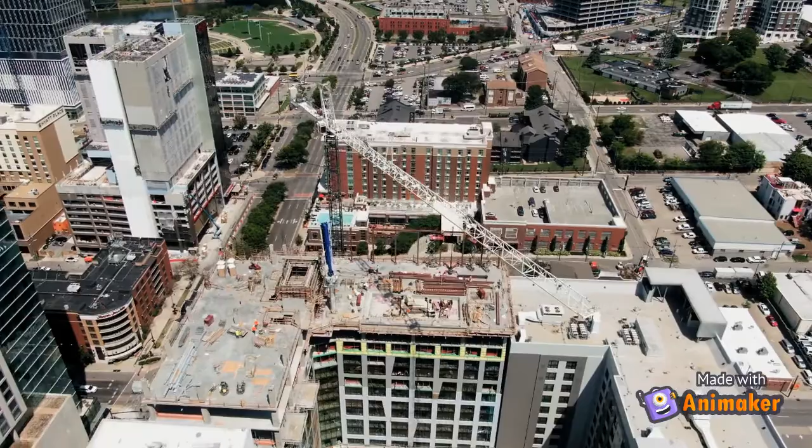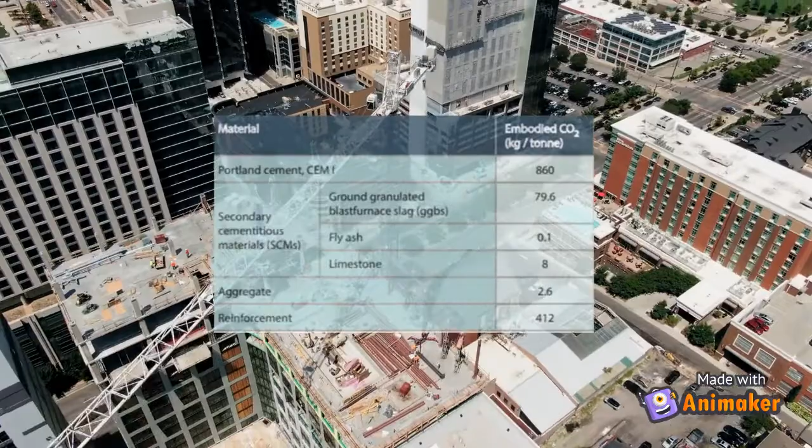The impact on climate change resulting from carbon emissions from anthropogenic activities is one of the major challenges in attaining environmental sustainability. Approximately 40% of annual global greenhouse gas emissions come from buildings, where embodied carbon is responsible for 28% of building sector emissions. Use of cement in concrete plays a vital role in emission from the building industry.

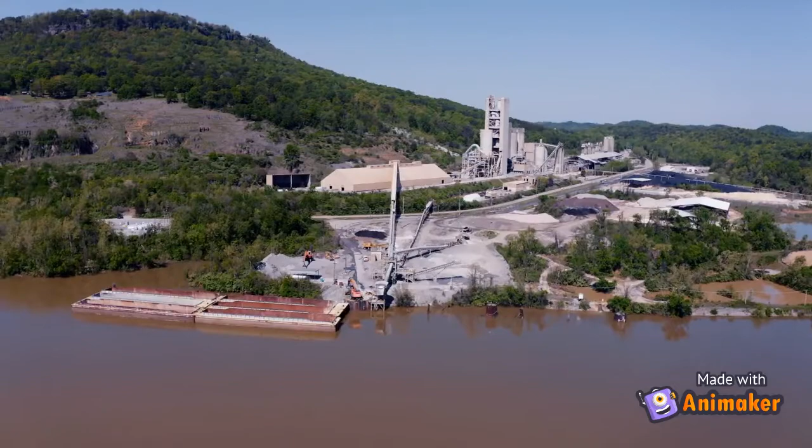Cement production currently accounts for about 5 to 7% of global emissions and is also the most crucial ingredient in one of the most common building materials globally. It is unimaginable to think about a world without concrete as we have across the globe. Bridges, offices, houses, dams, power stations, tunnels, and an infinite number of structures are made with concrete, from the immeasurably massive to the humble stepping stone.

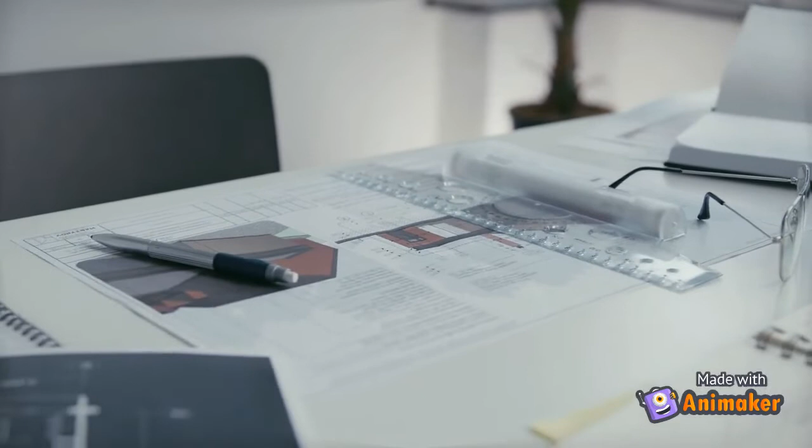The structural engineers who take part in most of the design aspects of buildings can play a significant role in turning construction into more sustainable and greener ones, with the right choice of building materials and adapting wise strategies during the design phase so that the buildings will have a longer service life and lower emission during their service life.

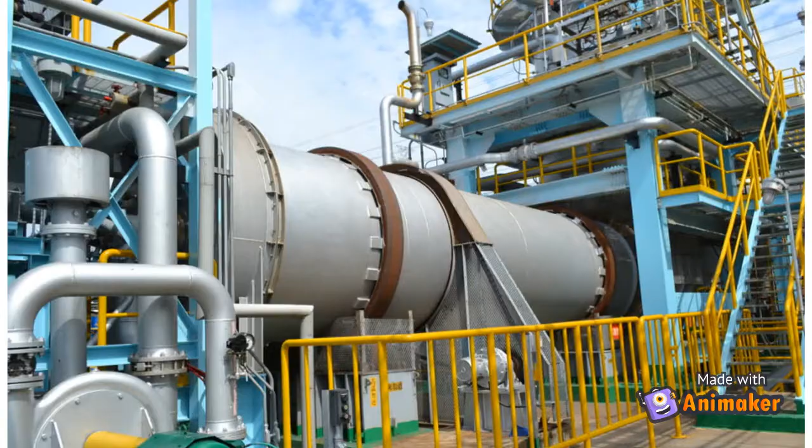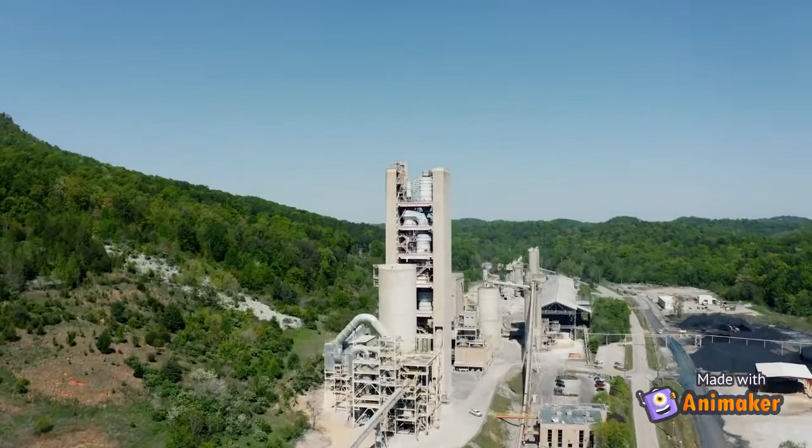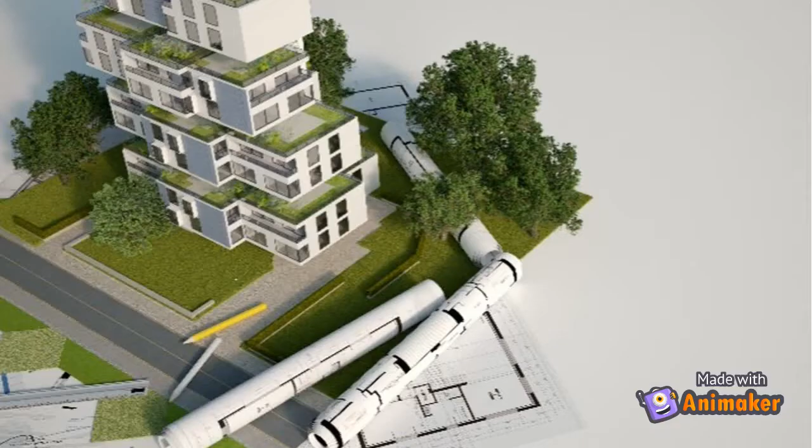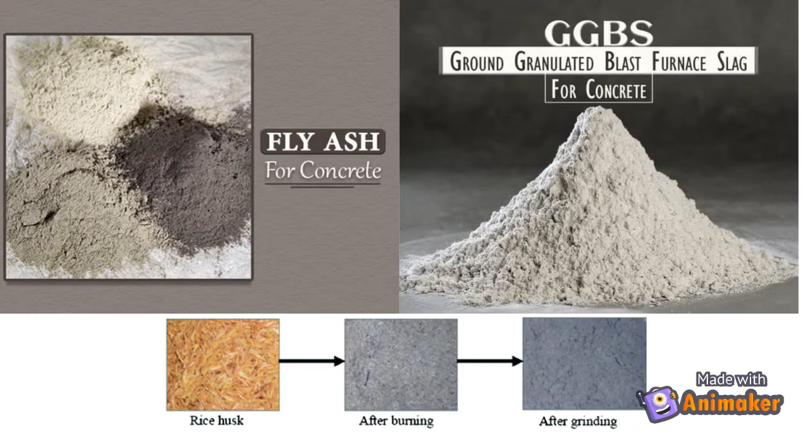A considerable amount of CO2 is from the heat produced during the non-stop running of hot kilns. However, half of Portland cement's emissions come from calcining limestone, which produces CO2 during the chemical reaction. Therefore, the most effective way to reduce the negative environmental impacts of concrete is to limit the use of cement or replace it with secondary cementitious materials. Building materials with carbon storage potential can offset the emissions from other materials in the buildings to achieve a net zero carbon footprint.

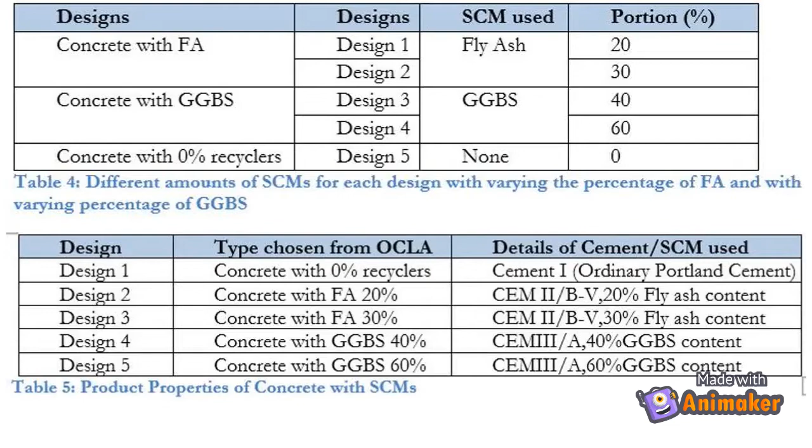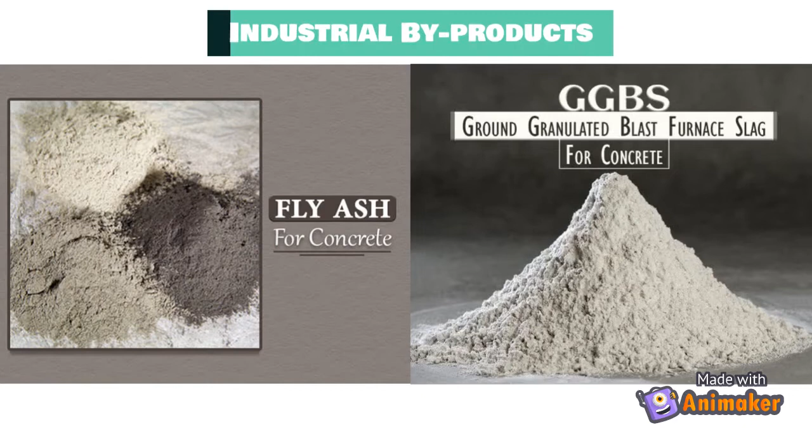The LCA results using One Click LCA of a simple residential building showed that the use of fly ash and slag can reduce the embodied CO2 in concrete considerably compared with that of ordinary cement. Since fly ash and slag are industrial byproducts, the use of those supplementary cementing materials corresponds well to this purpose, in a way conserving virgin materials like limestone and silica.

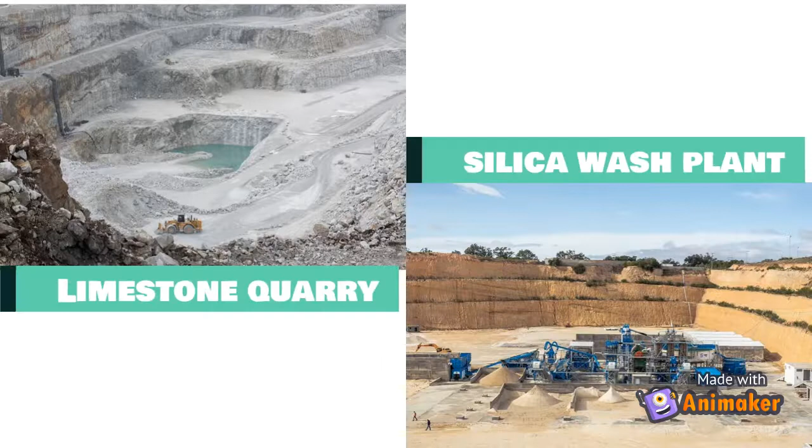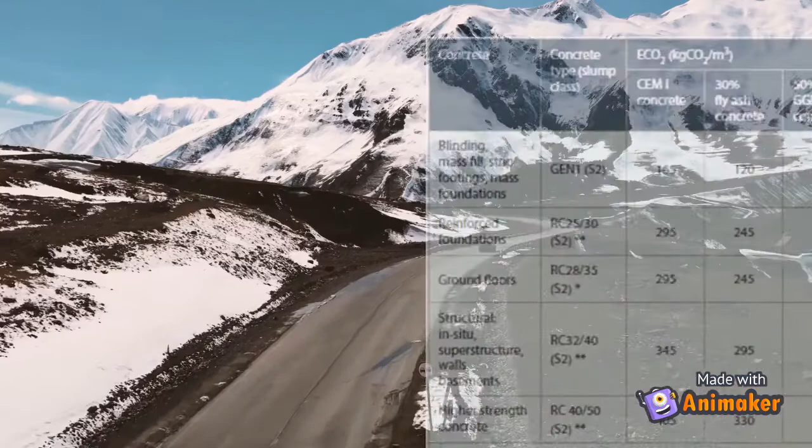The literature study revealed that the use of supplementary cementing materials not only provides environmental benefits but also makes the concrete more durable and improves the service life of concrete structures, especially in harsh environments.

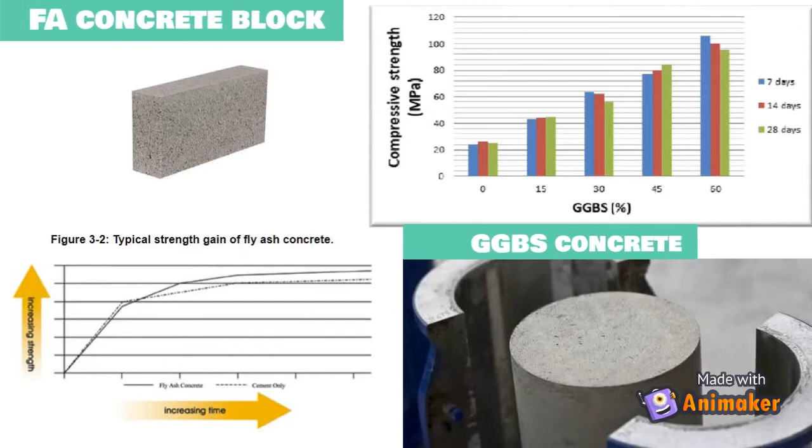The analysis of the impact characterization parameter abiotic depletion potential through One Click LCA showed that the abiotic depletion potential will be higher in the case of normal concrete, as virgin materials such as lime and silica are required in abundant quantities for cement production, whereas industrial byproducts such as fly ash and slag considerably help in reducing resource depletion.

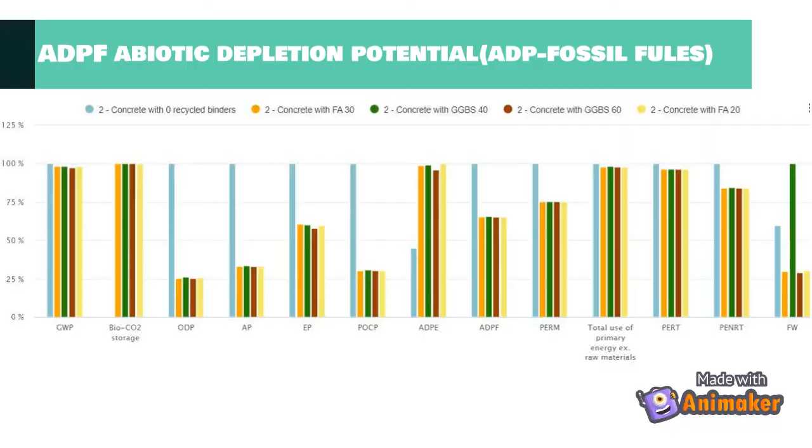Global warming is real, the climate is changing, so should we.